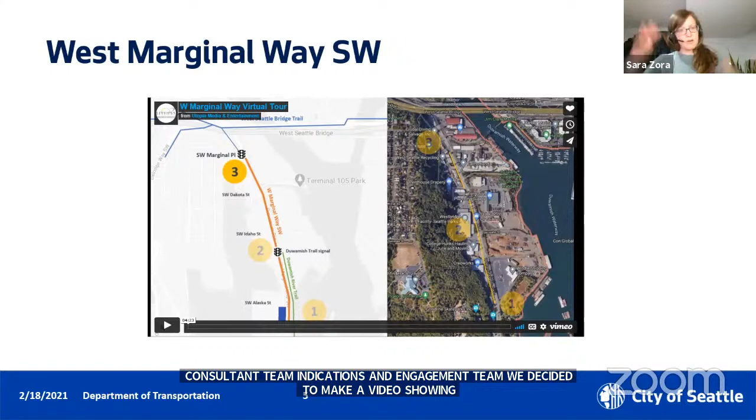I'm the Reconnect West Seattle Mobility Manager. We will be talking a lot about West Marginal Way today. Our consultant team, communications and engagement team, decided to make a video showing some of the proposals we are looking at for West Marginal Way. We wanted to make sure people have a sense of where we're talking about in the whole corridor. So Brad, if you could play this, and then we'll get into the presentation after.

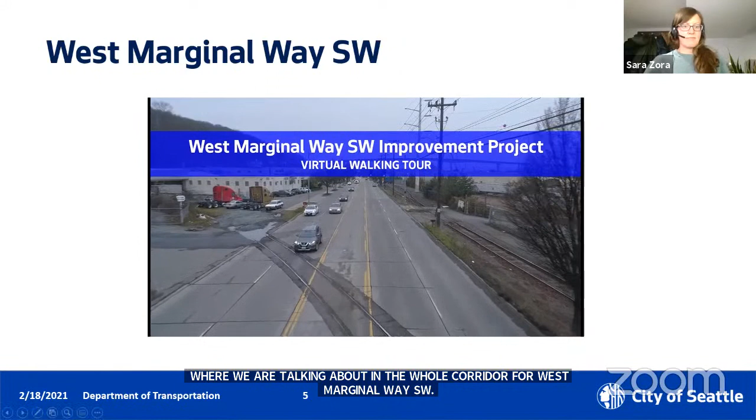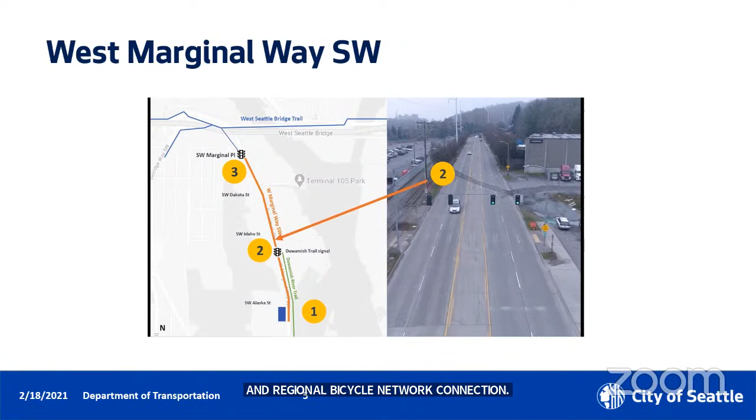Welcome to the virtual walking tour for the West Marginal Way Southwest Improvement Project. This tour takes place between the Duwamish Longhouse and Cultural Center and West Marginal Place near the West Seattle Bridge. This busy West Seattle corridor is used by multiple modes of transportation, serving as a major truck route, a North Peninsula vehicle route, and a regional bicycle network connection. Along the route, we'll visit 3 primary stops identified for improvements, ranging from a new crossing signal to a 2-way protected bike lane.

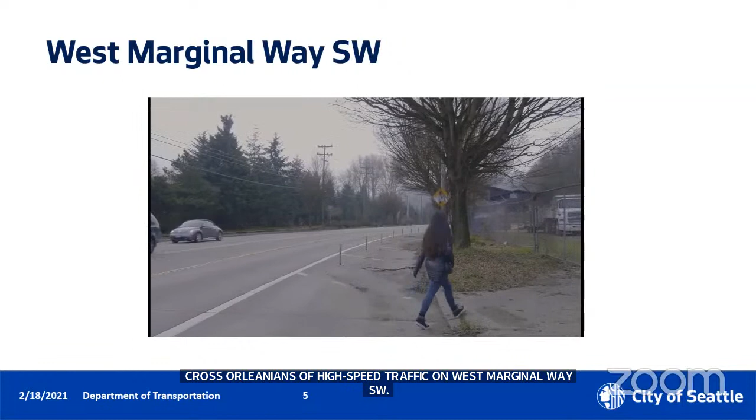We start our tour at Herring's House Park. The Herring's House Park and parking lot are located across West Marginal Way from the Duwamish Longhouse and Cultural Center. Currently, to access either the park or the Longhouse from the opposite side of the street, you have to cross 4 lanes of high-speed traffic on West Marginal Way. This crossing is unmarked and does not have sidewalks on the Duwamish Longhouse side.

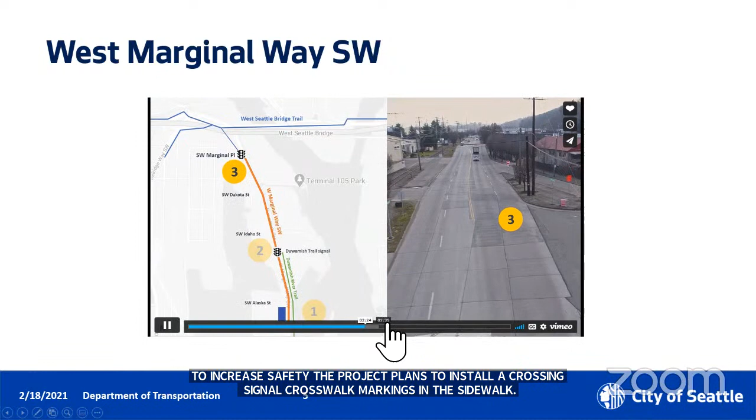The project team observed southbound speeds along West Marginal Way. To increase safety, the project plans to install a crossing signal, crosswalk markings, and a sidewalk on the west side of the street. The sidewalk will run north from the Duwamish Longhouse to Southwest Idaho Street. An interim signal will be installed in 2021.

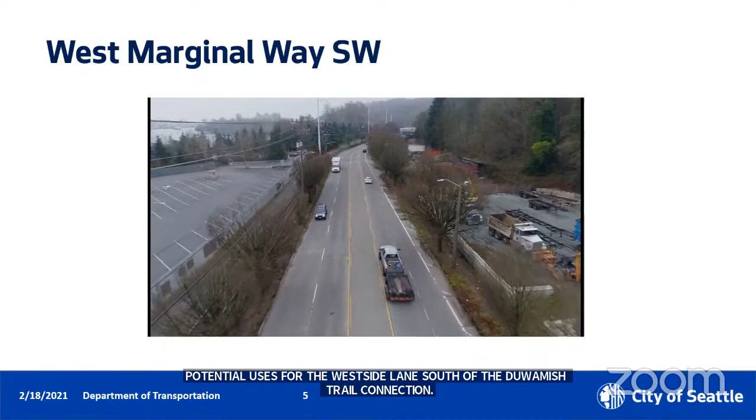To reach our second stop, we'll keep to the west side of the street and head north to Southwest Idaho Street. From there, the project is proposing to change the west side southbound traffic lane into a 2-way protected bike lane. This bike lane could connect to the existing Duwamish Trail on the east side of West Marginal Way. Potential uses for the west side lane south of the Duwamish Trail connection could be to continue the new bike lane to the Duwamish Longhouse, extend existing on-street parking, or open the lane back up to traffic. All options are currently being considered.

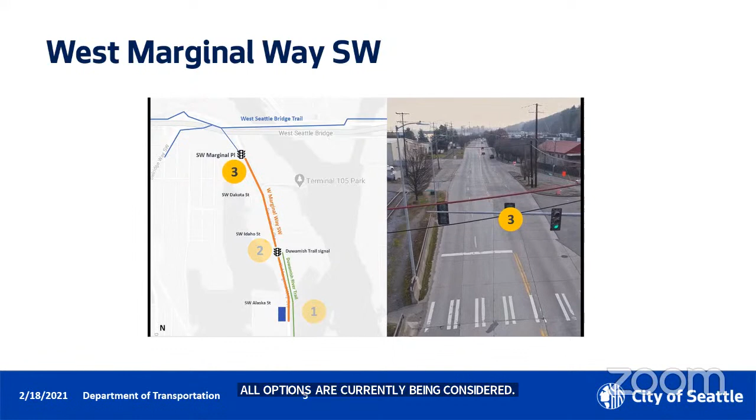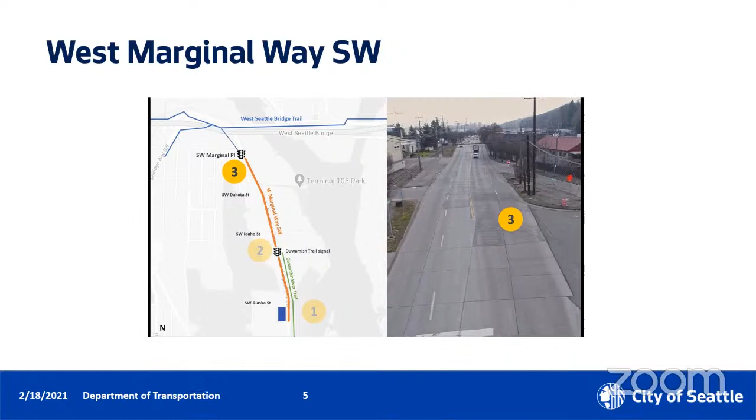Our final stop is just south of the West Seattle Bridge at West Marginal Place. This location was identified because of its potential to increase safety by reducing speeding along West Marginal Way. The project team observed southbound speed and travel patterns from West Marginal Place. This is the spot where West Marginal Way changes from 1 lane to 2 lanes. It was observed that most drivers stayed in the inside lane on the east side of the street, while those wanting to travel at higher speeds moved to the west side curb lane to pass.

To try and combat this high-speed passing habit, we lowered the speed limit from 40 to 30 miles per hour and installed 6 radar feedback signs. Even with these efforts, speeds on West Marginal Way remain excessive and continue to create a safety risk for other vehicles, freight, bicycles, and pedestrians along the corridor.

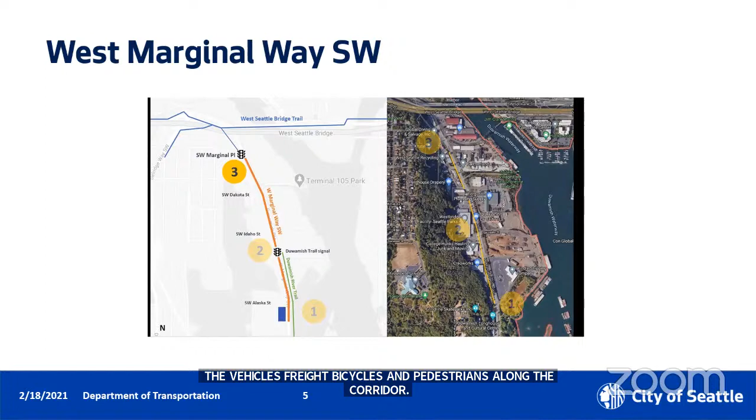To increase safety and create more predictable traffic speeds, we are proposing to maintain 1 travel lane southbound on West Marginal Way from Southwest Marginal Place to Southwest Alaska Street. Because southbound West Marginal Way is 1 lane under the West Seattle Bridge, the number of vehicles entering the southbound corridor is limited by street width, bridge support structures, and railroad constraints. As a result of this existing bottleneck, maintaining 1 southbound lane only adds about 10 seconds to an average trip at peak traffic periods. We continue to work with residents, businesses, and freight along the corridor and encourage you to ask questions and provide feedback.

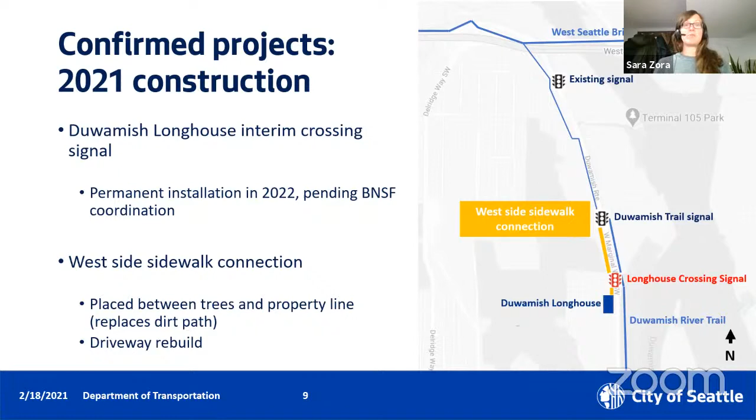With that, I'll mention we have two different frames of mind right now. The confirmed projects that are definitely going forward are the Duwamish interim crossing signals. We're going to do an interim build in 2021, and then the permanent condition will be built in 2022. In conjunction with that intersection crossing treatment, as you can see, it's just to the north of Herring's House Park, the parking lot.

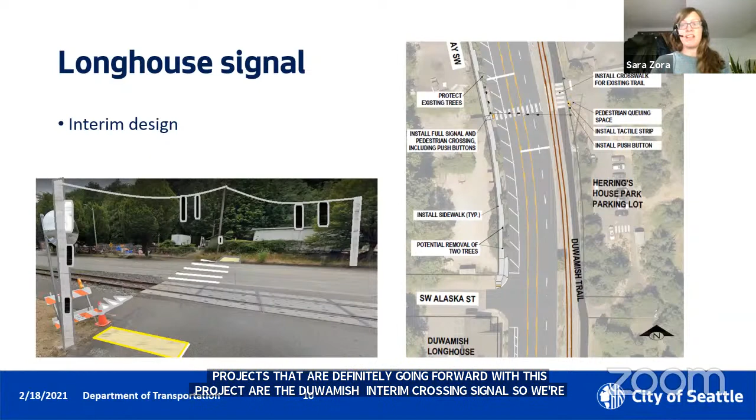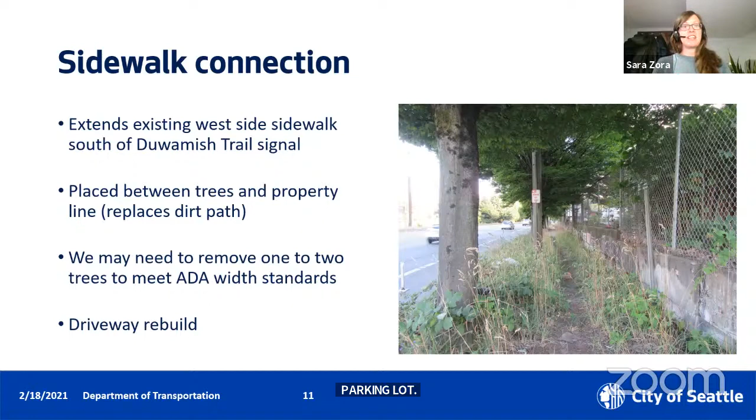That's going to be where the interim signal is, and then there's going to be a sidewalk path on the west side of the street to really connect into the Duwamish Longhouse. Right now, as you can see in the picture on your screen, it's just a dirt pathway, and we really have the desire to get an ADA accessible route from the Herring's House parking lot to the Duwamish Longhouse.

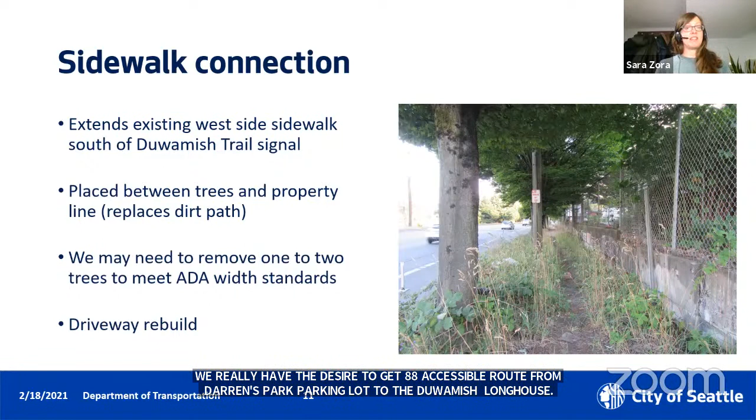If you go to the next slide, Brad will now take over talking about some of the analysis and data and constraints that we've seen on the corridor. After that, we're going to stop and pause to see if you guys have questions or comments about the analysis portion. Go ahead, Brad.

Cool, thank you very much, Sarah. Again, welcome everybody. So diving into what have we seen out on the corridor and what do we see today? West Marginal Way is one of the detour routes for the West Seattle High Bridge. When we look at the changes from pre-COVID and pre-bridge closure, so February of 2020, you can see that traffic volumes have increased a substantial amount, by 113% over the winter.

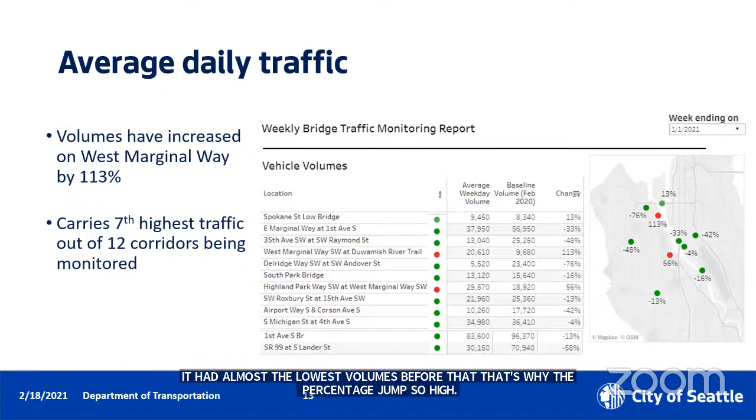Last summer, we were even seeing values as high as 150% higher. That being said, West Marginal Way was one of the lowest of all the 12 corridors we have been monitoring. It had almost the lowest volumes before that, and hence why the percentage jump is so high. When we look at it today compared to all the other locations, we see that it sits right around the middle of all the different major detour routes we are tracking in the West Seattle and SODO area.

Since our proposed projects are primarily impacting the southbound travel lane, a lot of the data we're showing is going to be southbound specific. What we're seeing in terms of current volumes today is about 1,000 vehicles an hour during the peak travel periods, the AM and PM rush hour. That being said, it pretty much plateaus throughout the middle of the day. On other corridors you tend to see higher peaks during rush hour, but out here the volumes have been spread out pretty evenly throughout the day.

Because it's a major truck street, we're also looking at truck volumes out there on the corridor, and we're seeing decently high volumes of trucks compared to other corridors. We're seeing the majority of trucks in the northbound direction, but still a decent amount in the southbound direction, following that same pattern where they're spread out throughout a lot of the midday. So those volumes are being balanced throughout the day.

We have been looking at speeds out there as well. This is partly due to the city's citywide speed limit reductions as part of some of the mayor's and our safety initiatives. But in addition to that, because of the Longhouse out there and the ability for pedestrians and bicyclists and all modes, including people who choose to drive, we know that slower speeds make for safer streets. So we've collected data at 3 different time periods over the last year, and we've done several different things.

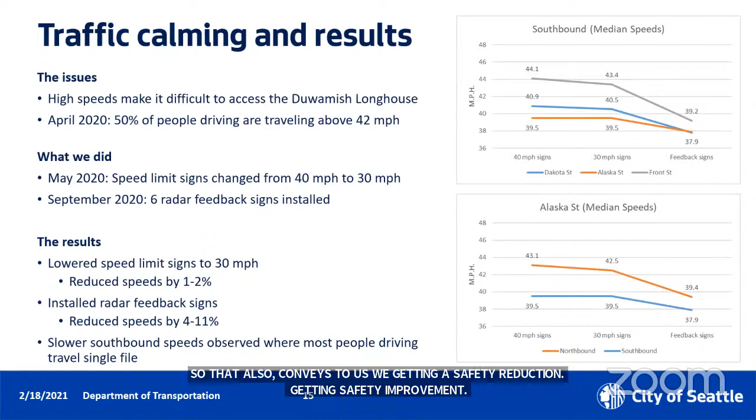Diving into the single lane at Alaska Street, we refer to this as the Duwamish Longhouse lane drop. This was installed in 2019, specifically for the purpose of the Longhouse. At the time, we had been working on a signal improvement, but that takes a few years to build up with utility checks and coordination. So we wanted to install something initially that provided some benefit in the near term. This helped improve sight lines at Alaska Street and also allowed us to provide additional on-street parking directly in front of the Longhouse, so people visiting for events or school field trips had a space to safely pull over and park to access the Longhouse.

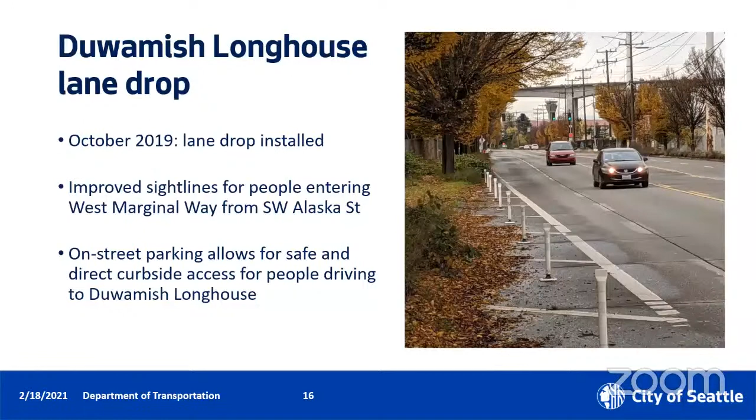Looking at Alaska Street, we've got the Longhouse on the bottom, Alaska Street in the middle, and looking to the north there's a curve in the street. There are several curves in West Marginal Way, but this specific point has several screen lines that block people's view exiting Alaska Street. There's a tree line screen and a chain link fence screen, both of which make it very difficult to exit the Longhouse.

We looked at two different positions. Position 1 was the prior condition where you had two southbound lanes, and position 2 is what we see out there today with a lane drop. So people exiting Alaska Street to turn onto West Marginal Way can pull out a little further to see further down the corridor and anticipate people approaching from the north.

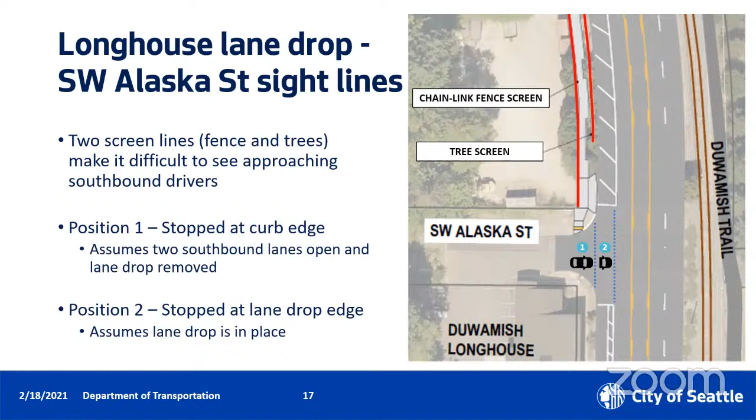This is what we see today. In position 1, if the lane drop wasn't there and you had two southbound lanes, that's about as far forward as you could pull as a driver, and it's very hard to see traffic except for what's very close to you, especially in that curbside lane. There's a little slot between the trees and the fence, but having driven this myself, it's very difficult to see. In position 2, you still have some of that tree screen line and chain link fence, but visibility is much improved.

Putting on our engineering hat and looking at the numbers, we have equations to help us equate a certain sight distance down the road to how fast a driver can safely stop. What we see is that in position 1, with two southbound lanes, you have very limited sight distance—you can't see very far. So a driver traveling south, in order to safely stop, would need to be traveling at 27 miles an hour or slower between the time a vehicle nosed out and they stopped.

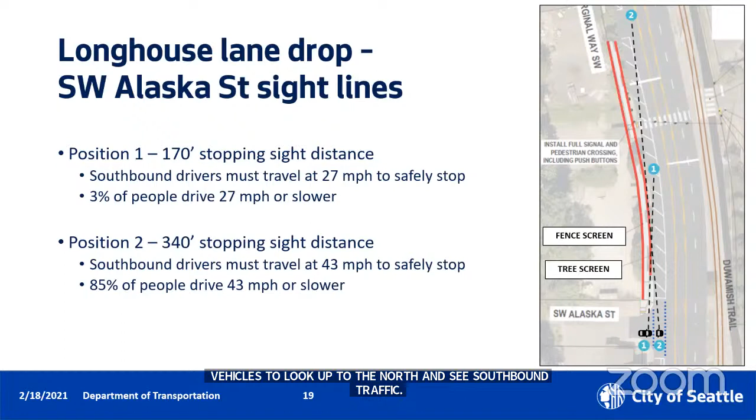In position 2, we get much more sight distance. Vehicles can see further down the corridor, so people traveling south find it much easier to see a vehicle pulling out, and it's much easier for those vehicles to look north and see southbound traffic. In that case, vehicles traveling at 43 miles an hour can safely stop once they see a vehicle pull out. About 85% of people are driving 43 miles an hour or slower.

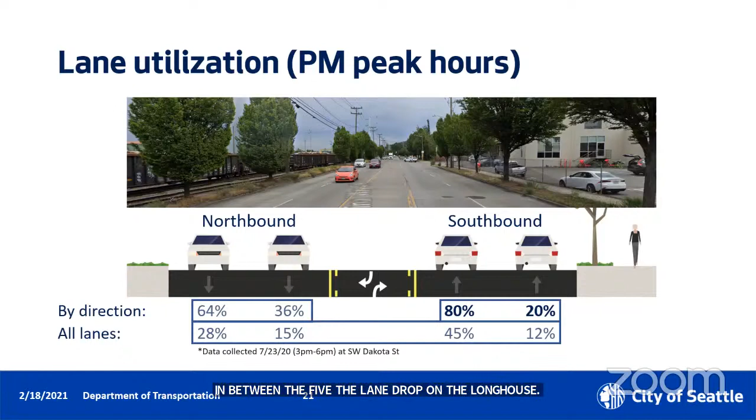When we look at travel times on the corridor, the amount of time it takes to get from A to B, when the bridge closed we did see a big jump. That was because at the Chelan intersection, the Chelan 5-way, and the Highland Park Way intersection, we have constraints. SDOT has gone back and repaved some of those, restricted turns, and re-phased those traffic signals to try to be as efficient as possible. But it's difficult. Those are our bigger constraints.

With the bridge closure, we saw an increase of about 10 to 25%, depending on the AM or PM period. So about 1 to 2 minutes of additional travel time, essentially between Harbor Avenue and the First Avenue Bridge.

With our proposal, a single southbound lane with the Longhouse signal installed, there's the potential that at worst periods you'd see about a 10-second delay, but that would be much less, closer to zero, off of peak periods.

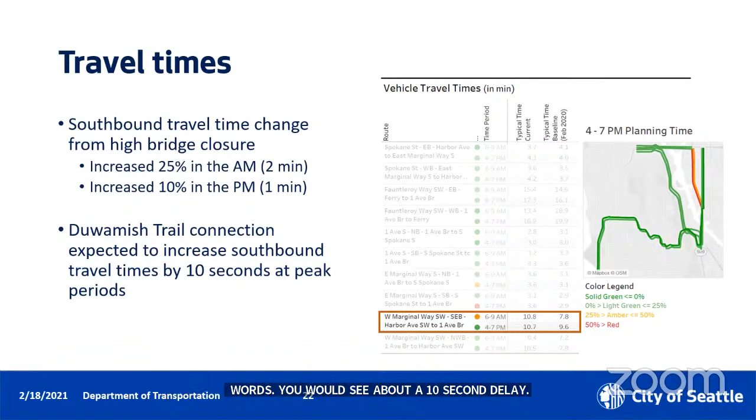Looking at some of our constraints today, I've seen people in the chat talking about the lane drop today and how you have an existing 2-to-1 configuration. So this is what we have today: 2 lanes coming off the Chelan 5-way merge to a single lane, which opens back up to 2, then merges back in front of the Longhouse, then opens back up to 2. We do have those constraints.

The Chelan 5-way is releasing our queues, or platoons of vehicles, groupings of vehicles, metering the corridor for the most part. At Highland Park Way, especially during peak periods, people traveling south end up sitting through several cycles. So what we may be seeing today is that those big major intersections are the biggest constraints on the system and have the lion's share of the impact on how long it takes to travel along that corridor.

Looking at the Chelan 5-way going towards West Marginal Place, essentially under the West Seattle Bridge today, this is our major constraint for the corridor. We have bridge supports in this area, active rail lines, and a very limited area where it's restricted at West Marginal Place.

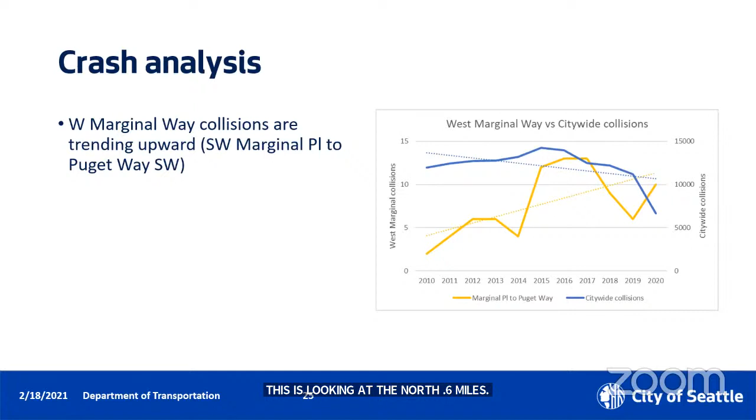Diving into some of our safety and crash analysis that we've been doing, we've looked at this specific stretch from West Marginal Place down to Puget Way, just south of the Longhouse. This is just the north 0.6 miles of the West Marginal Way corridor. The whole corridor from Chelan 5-way to Highland Parkway is about 2.5 miles, so we're looking at about 20% of the corridor here.

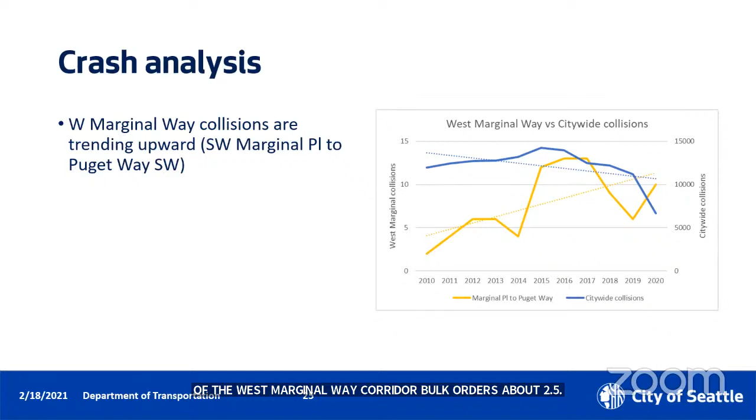What we've seen, especially in 2020, is that while citywide we've continued to see collisions trending downward over time, in this specific section we've seen collisions trend upward. Most notably in 2020, collisions went up here while citywide they went down.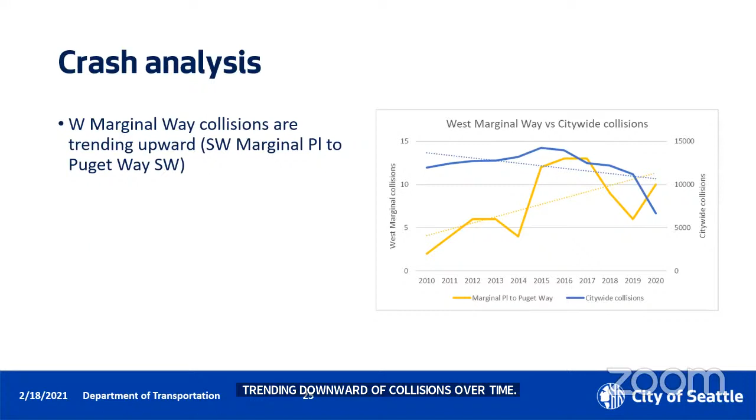If we dive deeper into the types of collisions, on the right we're seeing a lot of mid-block collisions happening, while typically on corridors you see more intersection collisions. Because there aren't any major intersections in the middle of this corridor, you don't have tons of major turns or signals controlling those, so we see a lot of mid-block collisions.

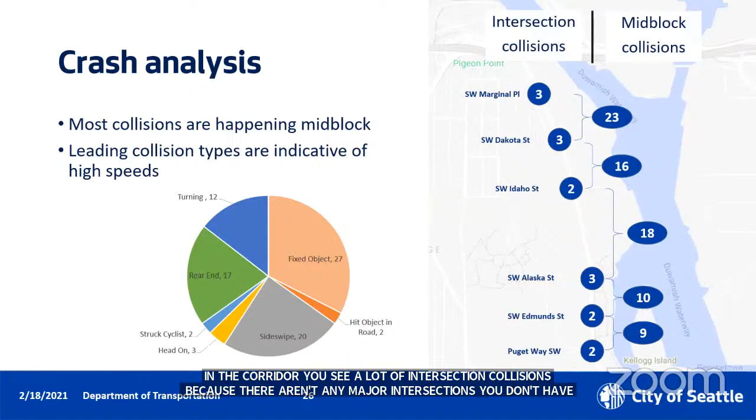And when we look at those, we see a lot of high-speed related collisions - rear-ending, side swipes, and what's called fixed object collisions, which is basically vehicles running off the road, usually related to high speed or distraction or both. We believe what we're proposing can help reduce some of these higher speed collisions.

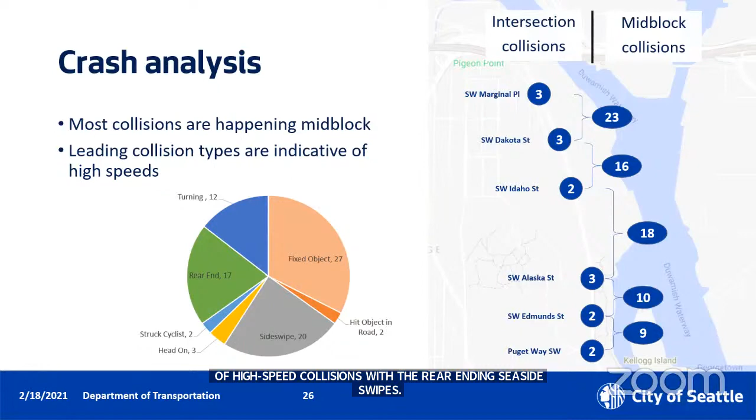We have been asked to look at the Terminal 5 project, and they have released their environmental impact statement. I should preface that this was released in 2016, so the numbers may change a little based on the current situation - we weren't anticipating a high bridge closure.

But we have looked at what's available to us and what the port has provided us. What we're seeing is that before T5, which is currently under construction today, was closed down, during peak periods in the southbound direction there were about 8 to 10 trucks an hour using West Marginal Way.

If I point back to that original slide about average daily traffic, when we were seeing 1,000 vehicles an hour, that only constitutes essentially a fraction of a percent of the traffic we're seeing today.

The West Seattle High Bridge is expected to open in 2022, so that'll be in between the Terminal 5 opening. Terminal 5 will be at partial capacity at the end of this year, 2021. Then the High Bridge will open, and we'll see full capacity for Terminal 5 in 2023.

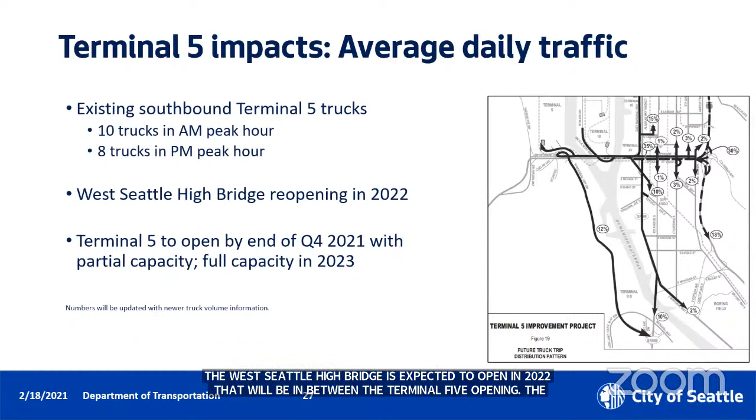With full capacity Terminal 5, the environmental impact statement from the port said they'd see only an additional 3 southbound trucks during peak periods - so instead of 8 to 10, you'd see 11 to 13 vehicles. So the impacts from T5 are going to be pretty small, even with bigger shifts related to the High Bridge closure.

These numbers are much smaller compared to what we see in our day-to-day traffic volumes, which can swing in the peak hours by 100 vehicles - it can be 100 vehicles more on a Wednesday than on a Thursday. So we think our analysis has encapsulated within it these extra additions from T5.

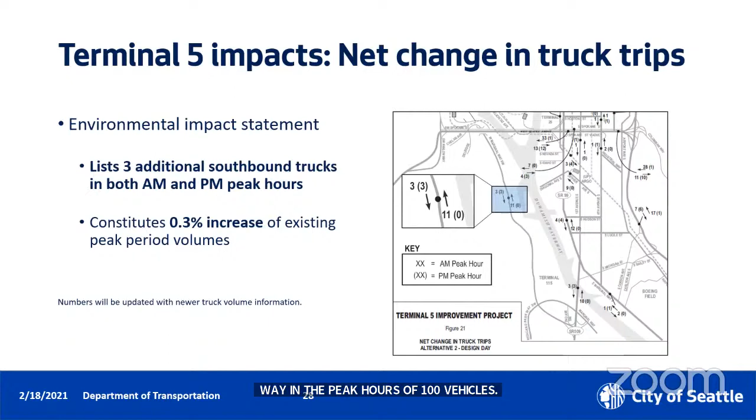So what have we heard? We've been meeting with the Freight Advisory Board, meeting with the port, and reaching out to stakeholders along the corridor. There's a maritime town hall which includes stakeholders in this corridor along with many others involved in the maritime industry.

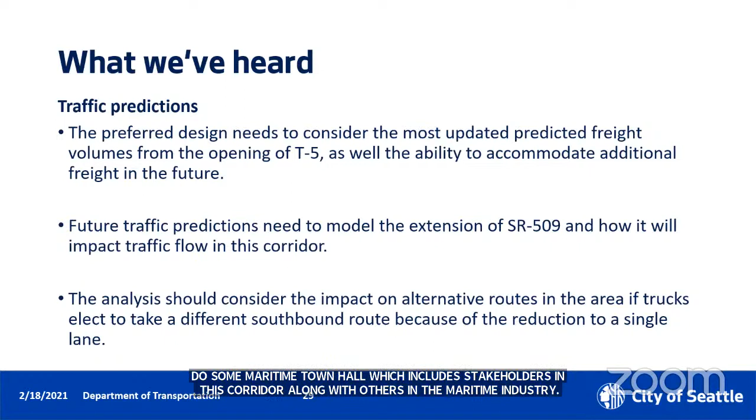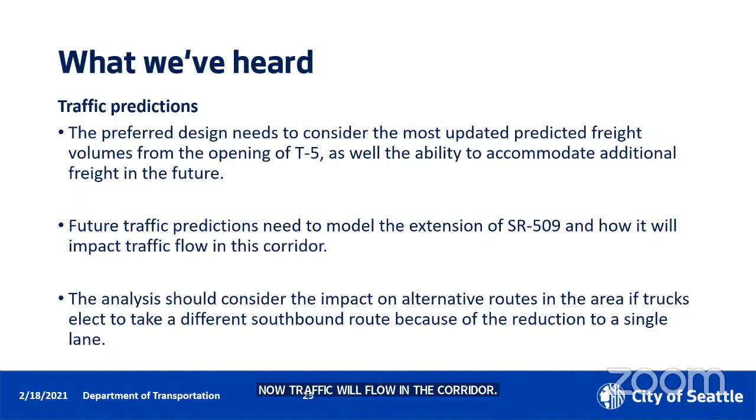What we're hearing is that the preferred design needs to consider the most updated predicted freight volumes from the opening of T5, as well as the ability to accommodate additional freight. We've also heard about future traffic predictions needed to model the extension of SR 509 south of SeaTac Airport and how it will impact traffic flow in this corridor, as well as analysis considering the impact on alternative routes if trucks elect to take a different southbound route because of the reduction to a single lane.

In terms of other additional analysis, SDOT should study and report the bike and pedestrian traffic on West Marginal Way Southwest, as well as complete a detailed safety analysis for all options before a decision is made. This analysis should show the potential impacts of introducing a two-way protected bike lane into a single signal-controlled intersection.

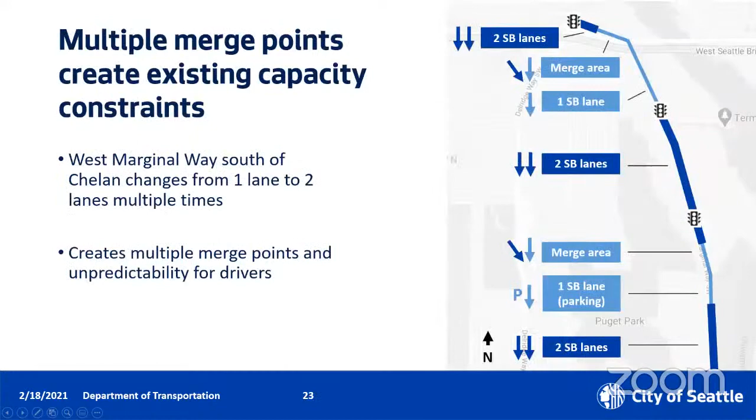Kathy, go ahead. Hi, this is Kathy Dunn. I have a question about the sidewalk improvement. Is that going to connect all the way from where the current pedestrian-activated crossing is, all the way to the Longhouse, so you could walk from the bridge all the way to the Longhouse without crossing West Marginal Way twice?

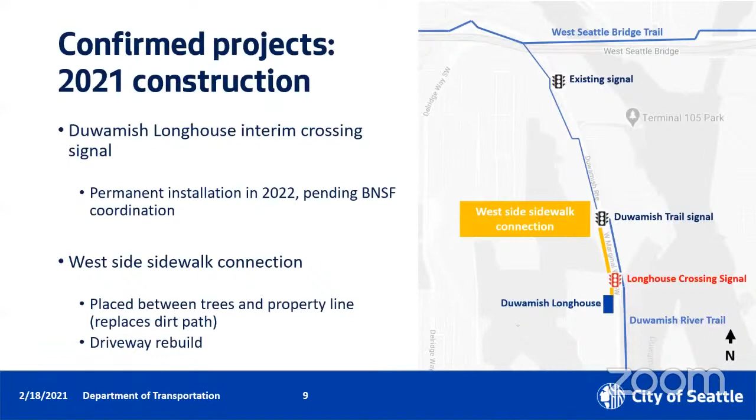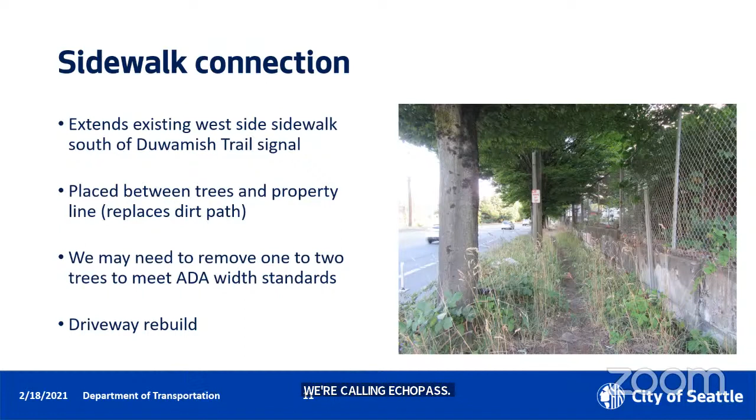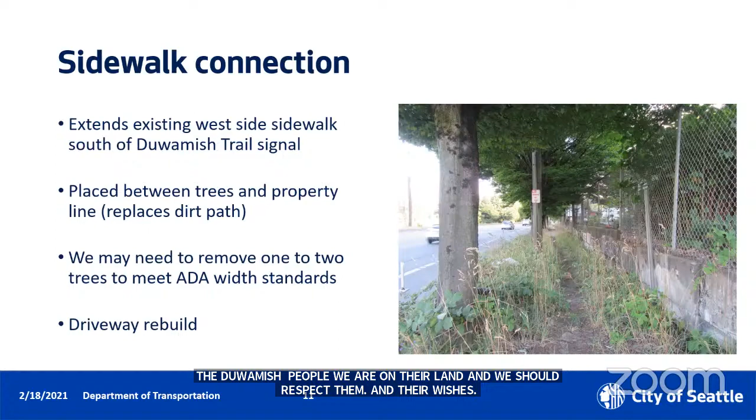Yes, I feel like I breezed over that slide and cut Sarah off, I didn't mean to do that. In the yellow section here, that's the sidewalk connection that would go all the way down to the Longhouse. Today, everything north of that yellow line exists. So you can walk from Delridge through the Chelan five-way and then down West Marginal Way to what's shown here as the Duwamish Trail signal. Then the sidewalk ends and we end up with this picture on the right, what we call a goat path. So we would build the trail in that section. Cars have been allowed to go along there willy-nilly, throwing rooster tails on people walking, and bikers have to share with pedestrians. The Duwamish people—we're on their land and should respect them and their wishes, which is to make it possible for people walking, biking, and driving to get safely to their location and enjoy the cultural resources there.

We cannot be spending all this money on bikes when last I heard bike ridership in Seattle was down double digits, approximately 23% I heard. And if it's going down, which it's been for a number of years, why are we still spending money like this on something that is having reduced usage? When we get back to full employment, I don't think we're going to have as many people biking because people will be working from home. Thank you very much, Bruce.

Hey Brad, I wondered if there's a quick answer to some of this piece before we move into the designs. I do just want to touch on the signal location, because this has in the past been a point of confusion, reasonably so. In the diagram on the right, you can see the Longhouse on the lower left, next to Alaska Street. But where we're actually proposing the signal is at the driveway to Herring's House Park, and that is very specifically because of the rail tracks out there.

They're controlled by BNSF, and they at this point do not allow for what they deem new crossings. So if we were to build a pedestrian rail crossing, you have to cross the rail tracks to get to the Duwamish Trail on the east side in that location. That's a new crossing, and they say we don't allow new conflict points. You can only modify existing ones, or you can remove other existing conflict points, meaning shutting down driveways other places along the corridor. We've looked at that.

What made the most sense and was the most cost effective for us, and didn't require us to shut down other driveways to businesses, was to modify the existing driveway at Herring's House, and we're going to widen that a little further. We have an interim design where we'll have to utilize part of that driveway, but in the long term we're going to widen it to provide more pedestrian space. And so that limits what we can do at Alaska Street, because we're already going to have this signal and all this infrastructure up there.

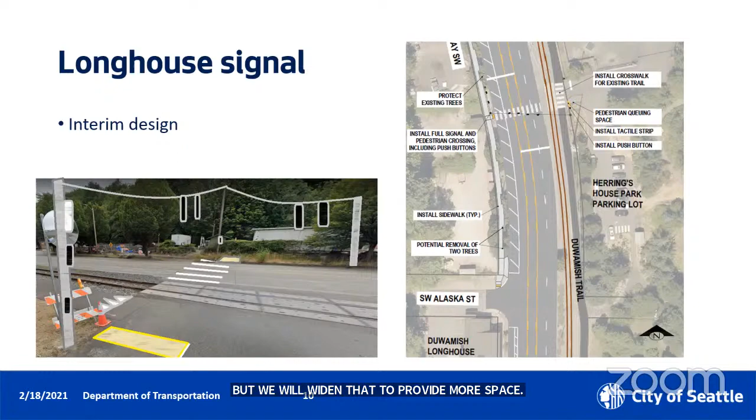Great, thank you. So diving into our proposed designs here, these are the two areas we're looking at: everything from West Marginal Place south to the Longhouse. You can see the existing bicycle trail connections in light blue. So we have the West Seattle Bridge Trail to the top, and the Duwamish River Trail at the bottom, which today crosses from east to west at the Duwamish Trail signal and then uses the existing sidewalk out there.

This is also just the top 0.6 miles of the whole West Marginal Way corridor. Everything south of the Longhouse at this point, we're not looking at changing the configuration. So there's still almost 1.5 to 2 miles of roadway between here and the Highland Parkway intersection.

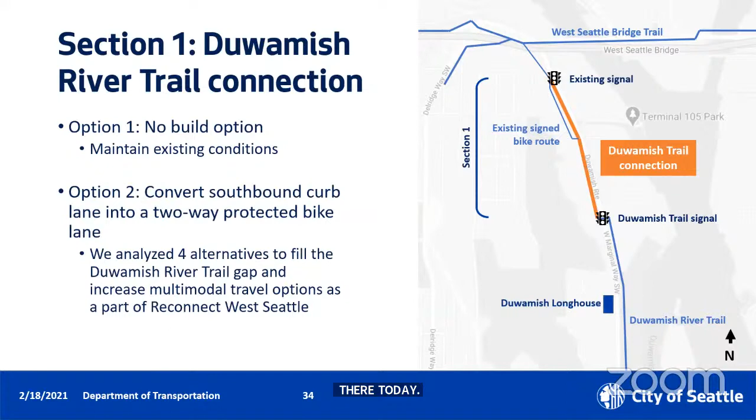Looking at the area we're deeming section 1, we have two options: a no-build option, maintaining what's out there today, or a build option, converting the southbound curb lane into what we call a two-way protected bike lane. We've looked at 4 different alternatives. One of the last questions was asking why don't we keep this on the east side, and I'm happy to talk about that a little bit here. So we looked at these 4 locations as to where to place the bike facility.

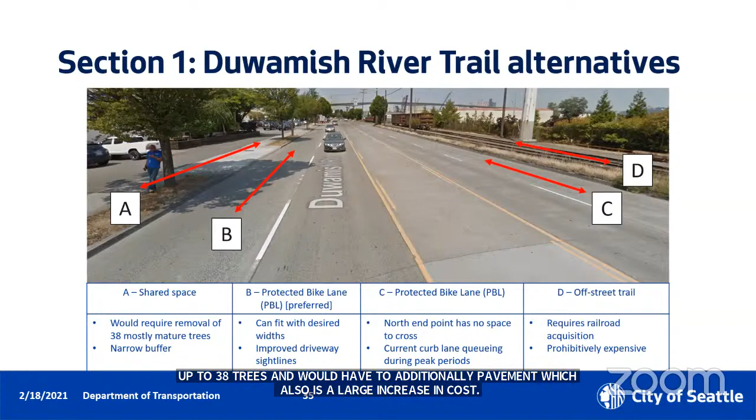Here's an example of what that would look like. So we would have a 2-way bike lane. It would mimic kind of a trail, essentially taking the people that are in the narrower facility with the blind driveways and the sidewalk and just moving them into that same street.

So it should improve sight lines at driveways, as well as providing a more comfortable facility. And we've got some extra room to play with out there, we can maintain extra width for freight vehicles. 11 feet is our standard travel lane width, and we have plenty of space to continue to maintain the widths that the freight providers are asking us for.

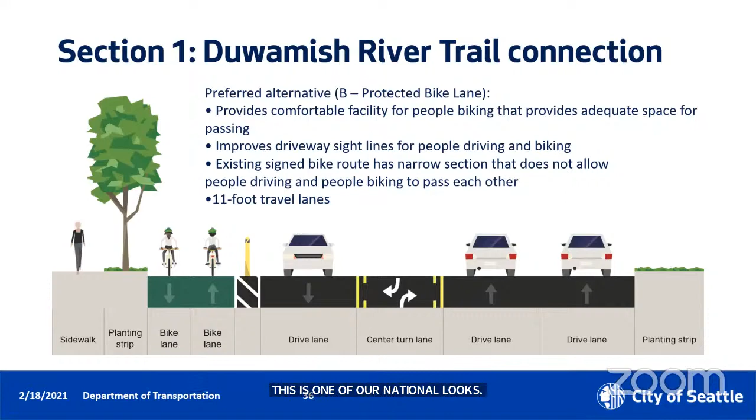In addition, the rendering here shows what we sometimes call our paint and post option—paint on the street with a kind of flexible post. We are definitely considering beefier designs. I think this is just one of our initial looks at it, but we are considering concrete barriers or planters or something a little wider to provide a more comfortable and safe space.

So moving to the south, getting back at that lane drop that exists today in front of the Longhouse, we illustrated some of the concerns we have out there with sight lines. We showed that video from the Longhouse that shows when we have 2 lanes, you can't physically see north as a driver. It becomes very difficult to see vehicles approaching from the north.

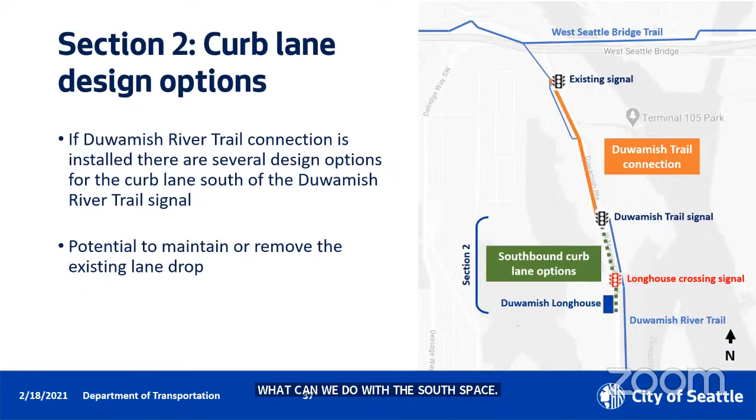And so section 2 is, if we go with the build option for the trail, what can we do with the south space? Again, focusing on the Longhouse, focusing on the fact that we want that place to feel safe. We want slower speeds in front of the Longhouse for pedestrian safety, for visibility, and things like that.

So we've got 3 different options out here. We could look at extending that proposed 2-way protected bike lane further to the south, to connect all the way down to the Longhouse crossing signal. Benefits of that: you get better direct bicycle access to the Longhouse, but you are being duplicative because there's already existing trail on the east side of the road.

The second option would be—there's existing parking in front of the Longhouse—we could extend that further to the north. The advantage is that would provide 30 additional parking spaces out here that could be used for overnight freight parking or during the day. We've talked with the port, and they do have freight providers that might be interested in using the space during the day to park some of their rigs or their cabs.

It could provide overflow parking for Herring's House Park, as well as the Longhouse when we're not in quarantine. It holds about 15 to 20 events a year, and that would provide additional space for them as opposed to having to clog up Herring's House Park, or sometimes they have to rent space from the SPU operations center across the street. But then the issue is if the parking utilization is low, we may run into aggressive driving behaviors where people might be passing in the parking lane, and we would have to take additional measures to put other types of posts or things in that space to prevent or discourage that.

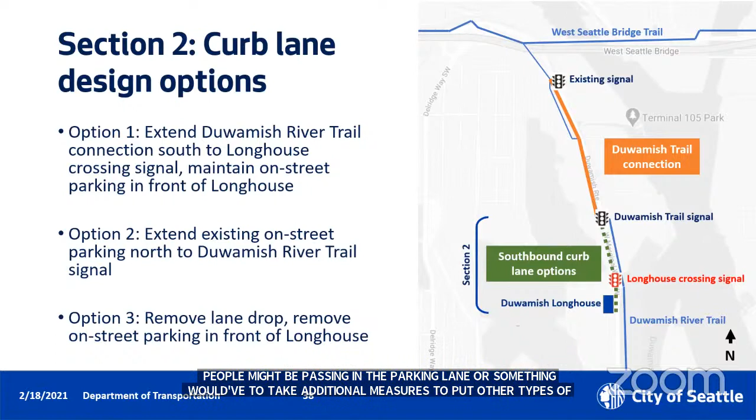And then option 3 is to remove the lane drop and remove the parking in front of the Longhouse, and basically extend 2 southbound lanes through that area.

Jumping into our preferred options. Again, we are still writing down all your questions as we do want to hear your feedback. But we want to be honest and transparent about what we're seeing out there, where the data is pointing us, and what our preferred options are.

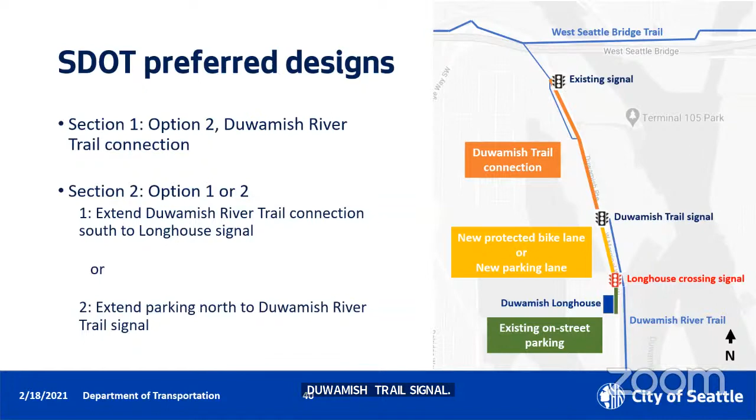So our preferred option is to install a 2-way protected bike lane between West Marginal Place, the existing signal on the top, and the Duwamish Trail signal. And then in that space, do one of 2 options that continues to maintain a single southbound lane all through the corridor. So those options are: either extend the protected bike lane, or extend the parking and maintain that parking in front of the Longhouse.

Why are we doing this? Why are we proposing this? I'm hearing all the comments, I'm hearing all the concerns, I'm hearing the frustration and the anger over the High Bridge. I get it, it sucks. The High Bridge is a terrible situation that we're in.

But what we can see here, and what we've also been hearing from some of the comments, is that what we're seeing today is there's already some single lanes out there. There's already a single lane at Alaska Street in front of the Longhouse, and what we're seeing is vehicles generally already in a single lane condition traveling above the speed limit. So in essence, without delay today in a single lane scenario.

We've done additional analysis as requested by some of the freight providers in the port to continue to look at freight operations out there, driveway operations for businesses, and what we're seeing is basically the same effect with 1 lane to 2 lanes for the most part.

And again, we want to continue to point at the existing bottleneck at West Marginal Place underneath the West Seattle Bridge. We can't, if I heard one of the questions about, we need to expand capacity out there, and if we could in that area, that would be a potential, but we can't move the High Bridge structure. We can't move the railroad without years and years of coordination. We can't demolish a working warehouse and a business today. So we're really constricted by that single southbound lane there.

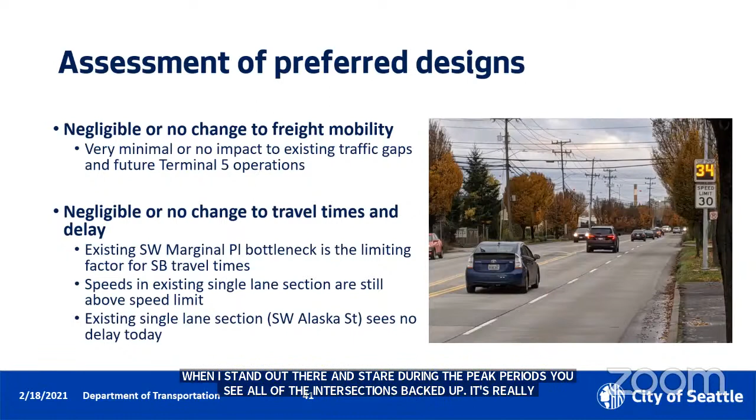That kind of really, again, and as other people alluded to, the capacity constraints at Highland Parkway and the Chelan 5-way. I mean, those intersections are pretty maxed out. When I stand out there and stare during the peak periods, I mean, you see all the legs of those intersections backed up. And so it's really difficult. We have tried and retimed the signals, but those are the main constraints along this corridor that really determine your travel time.

And so what do we see as the benefits? We see reduction of risk factors. We see lower speeds closer to the speed limit with a single lane. We eliminate that potential for high-speed passing in this area where we have more concerns for pedestrian access and safety and people who are biking and mobility. We continue to see improved sight lines at those driveways as well as at Alaska Street, and the ability to provide a comfortable and safe facility for people bicycling.

And so, in summary, we're seeing a lot of benefits without the detractors. No one's denying that the High Bridge is frustrating and difficult and a not fun experience at this time. We see an opportunity here to provide additional benefit, provide additional safety, provide more mobility at essentially a negligible or no impact to your travel time if you're driving along this corridor, or your user experience as you drive along this corridor. It would provide a more predictable experience that you would just stay in a single lane for longer, and then you can still expand out to 2 lanes once you get beyond the Longhouse.

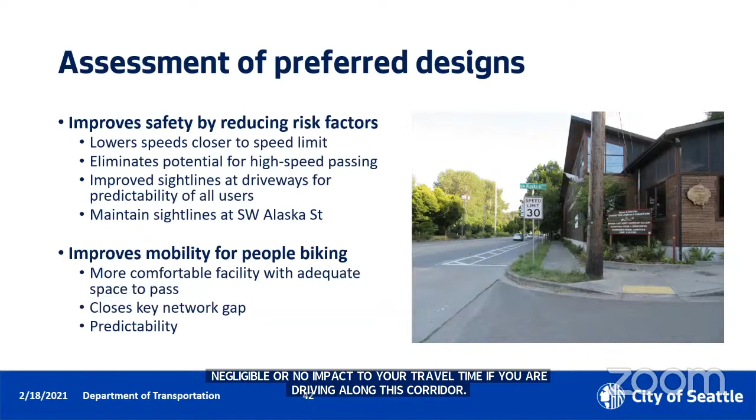Diving into, again, kind of more things that we have heard on this project. Lowering speeds and increasing safety and complementing systems for all the city's modes is important, but those designs should not come at the expense of the freight network capacity and flexibility.

SDOT should clearly describe how they are balancing truck and car traffic in this industrial corridor with limited bicycle and pedestrian users. This is a major truck and heavy haul route in one of only 2 designated manufacturing industrial centers in the city. The Duwamish Valley neighborhoods deserve bike lanes. Bikes should be able to coexist with freight.

Looking at some of the design considerations we've heard, the signal at the Longhouse should move forward for safety. Once that signal is completed, the lane reduction that is currently in place at the Longhouse should be discontinued. Vehicles currently stay in a single lane in this area because of the lane reduction at the Longhouse. If this lane reduction were not in place, vehicles would use both lanes. There's currently an area of congestion under the bridge where the lane reduction occurs. The proposed design would extend the area of congestion just under the bridge all the way to the Longhouse. The north end constraint could change in the future.

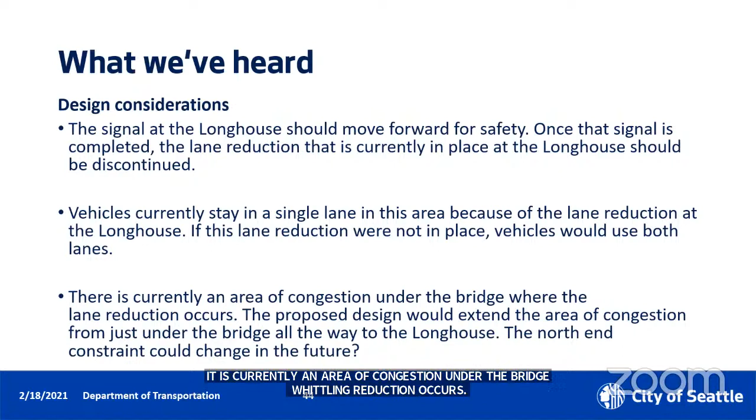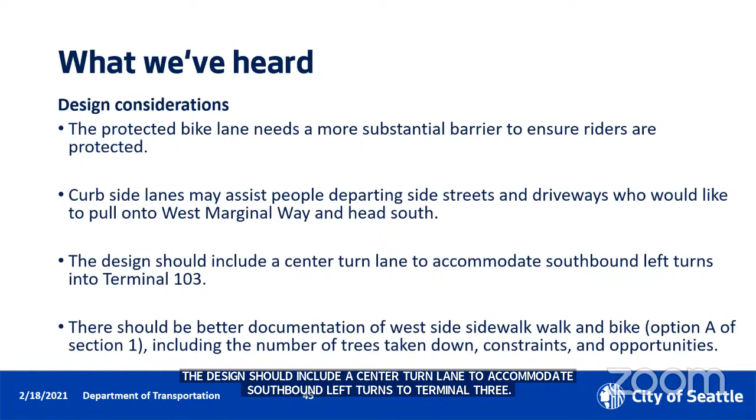Additional considerations we've heard: the protected bike lane needs a more substantial barrier to ensure riders are protected. Curbside lanes may assist people departing side streets and driveways who like to pull onto West Marginal Way and head south. The design should include a center turn lane to accommodate southbound left turns into Terminal 103. There should be better documentation of west side sidewalk and bike options, including the number of trees taken down, constraints, and opportunities.

Back to you, Angie. Thank you.